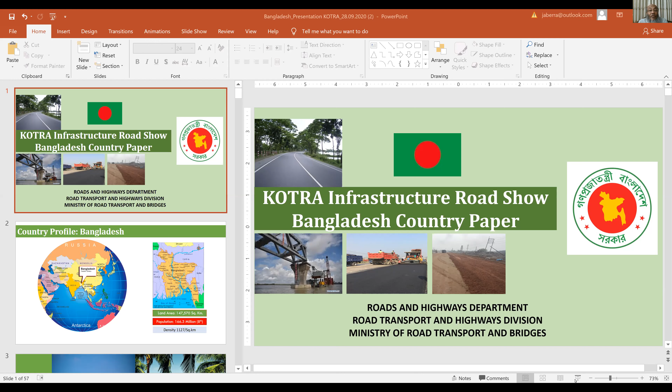About the country Bangladesh, although you may know, the land area is 147,000 square kilometers and we have around 166.3 million population. One of the highest densities of population in this world, about 1,127 people per square kilometer. From the map shown on the left side, you can understand the location of this country.

I guess you are interested about the status of infrastructure in Bangladesh. This is one of our roads we recently built. We are trying to maintain quality-wise like this or even more. This one doesn't show any service road alongside, but we have service roads.

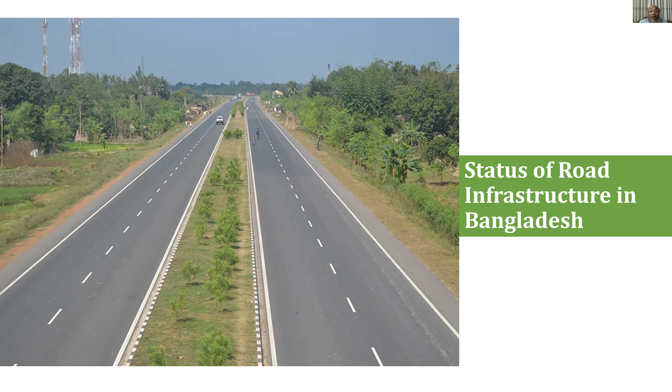This is the structure of our road administration procedure. As you see on our left, we, the Roads and Highways Department, look after the national highway, regional highway, and Zilla highways. If you have time, you can see all of those on our website.

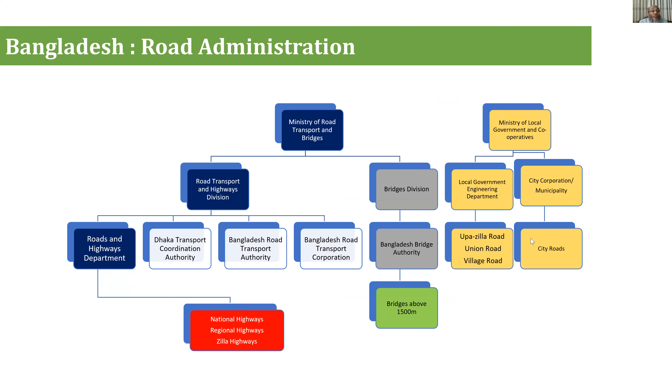We have 4,500 bridges and more than 13,000, about 14,000 culverts in our asset.

So far, we have developed a number of policies and acts related to our road management. Those are the Highway Act, accelerated axle load control station operation, road maintenance fund board, toll policy, land management policy, road transport act, etc.

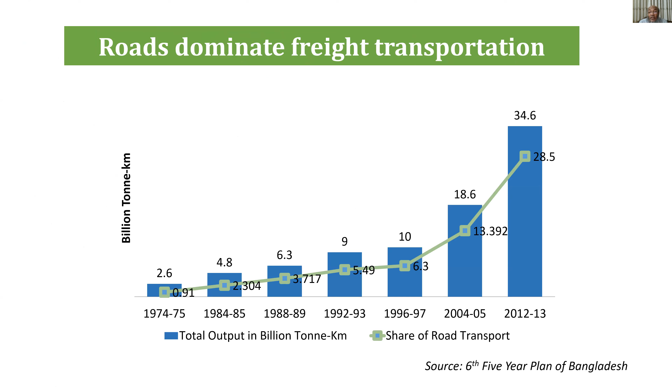Normally, compared to other modes of transport, road dominates freight transportation higher than any other transport mode, and this is ever increasing, as you can see here. The same goes for road-dominant passenger share as well. These are the basic data, and again, it also shows that it is ever increasing every year.

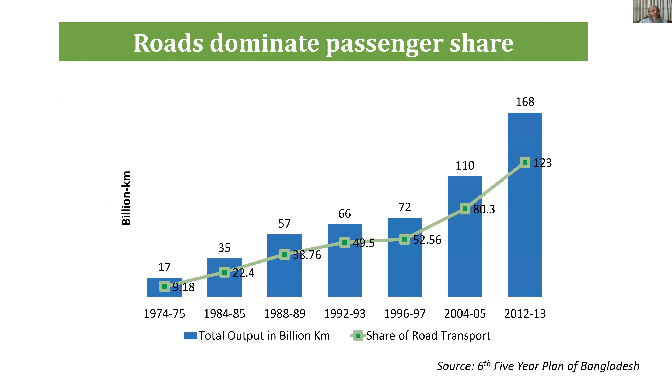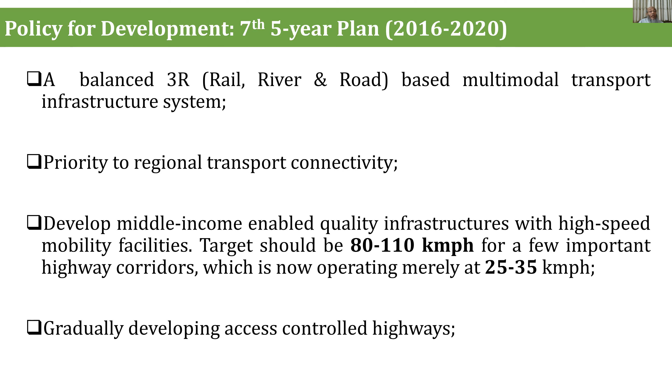In our seventh five-year plan, which spans from 2016 to 2020, we are now trying to balance the 3R: rail, road, and river mode of transport multimodal infrastructure system, prioritizing regional transport connectivity, and developing middle income level quality infrastructure with high-speed mobility facilities. The target should be 80 to 110 kilometers per hour, and gradually we are developing interchange structures, construction of interchange facilities besides highway widening on major junctions.

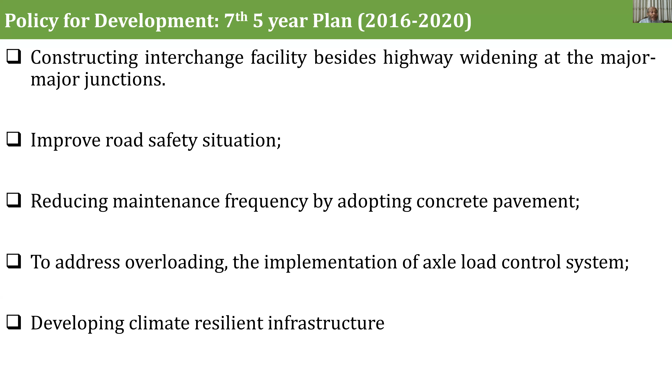Improved road safety is also a concern for us, and reducing maintenance frequency by adopting concrete pavement. We have a number of material options to look into to address overloading. The implementation of an axle load control system is also something we are trying to implement, and as you have done already, we are also trying to develop climate-resilient infrastructures.

Our roads are a part of our regional connectivity corridor. As you know, the country Bangladesh is surrounded mostly by India; only at the east, southeast part is Myanmar connected. These regional connectivities include the Asian Highway, SAARC Highway, SASEC Highway, BIMSTEC Corridor, and BCIM Corridor. We have a total of about 2,777 kilometers of roads that are part of these regional connectivity corridors.

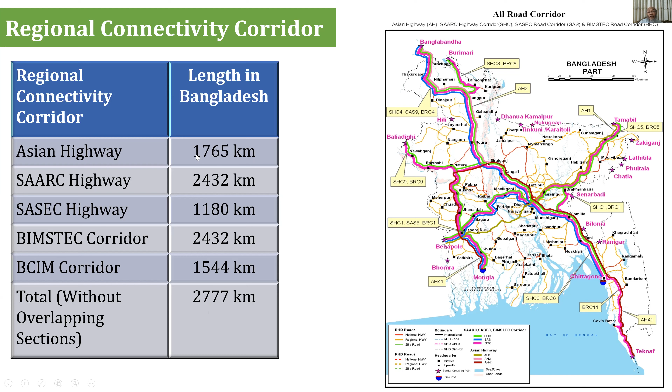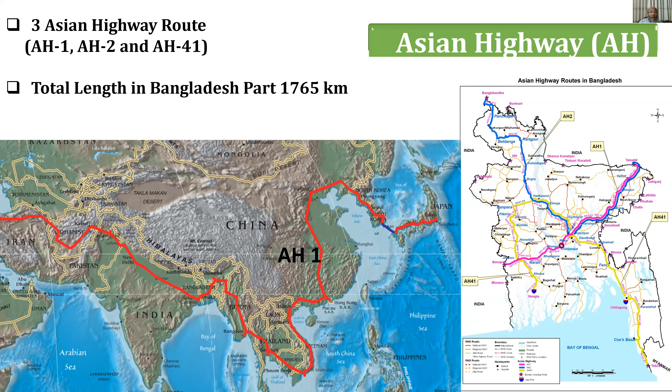Bangladesh passes three Asian Highway routes: Asian Highway 1, 2, and 41. Total length of this Asian Highway road in Bangladesh is about 1,765 kilometers. All those are shown in the map highlighting colors.

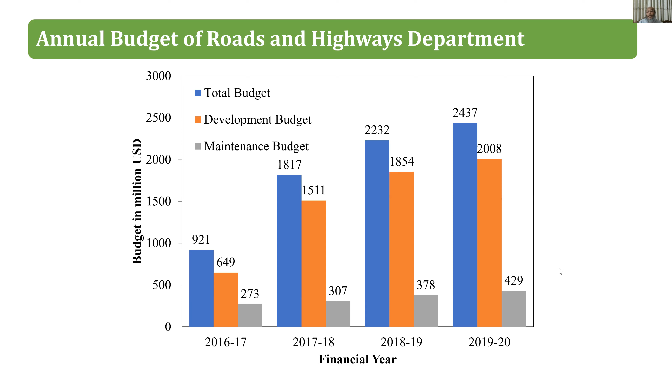Individually, this is about the Kanchpur, Meghna, and Gumti three bridge project funded by JICA, constructed, and almost finished by a Japanese firm called Obayashi Corporation. Project cost was 1.06 billion US dollars.

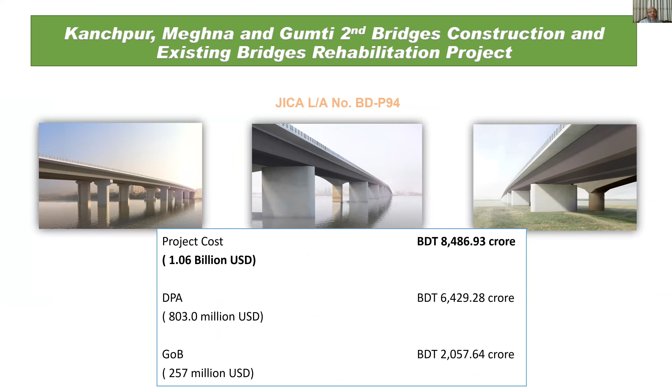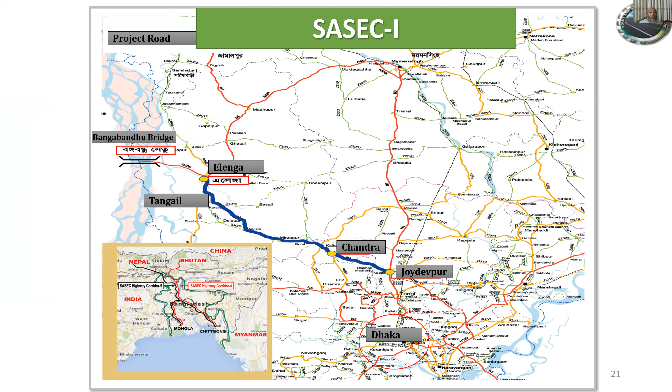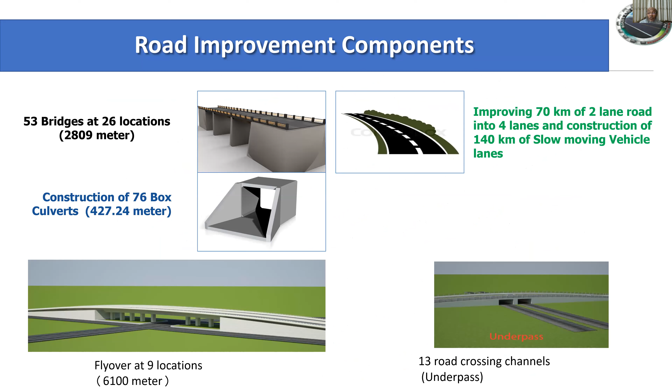SASEC 1 is another important corridor we are trying to develop, from a place just beside Dhaka city, Joydevpur, to Elenga. It's a typical road improvement case with components like 70 kilometers of road, 53 bridges at 26 locations, flyovers in 9 locations, box culverts, and some 13 road crossing channels, underpasses, and footbridges.

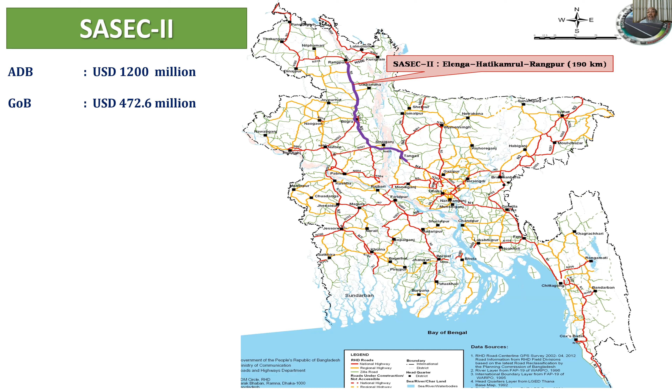SASEC 2 is another ongoing ADB funded project, about a $1.2 billion project that also continues. It starts from the end of SASEC 1, at a place called Elenga, and then goes to the northern part of Bangladesh, Rangpur, close to the Indian border. Major components are flyovers at 3 locations, underpasses at 39 locations, 26 bridges, and improvement of 190 kilometers of road.

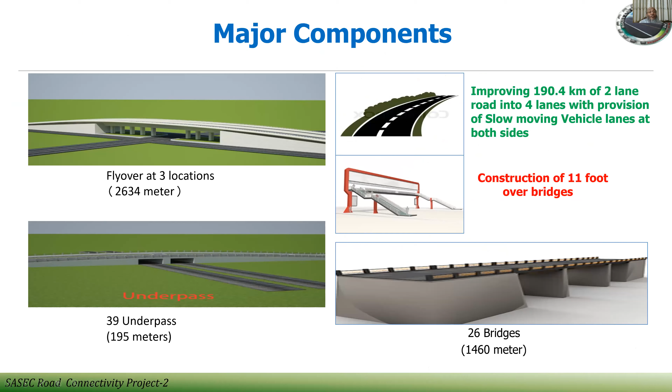Cross-border infrastructure development project is another JICA funded project. In this project there are a number of bridges, and one of the major bridges, called Kalna, is 680 meters. Again, Japanese construction companies are implementing those.

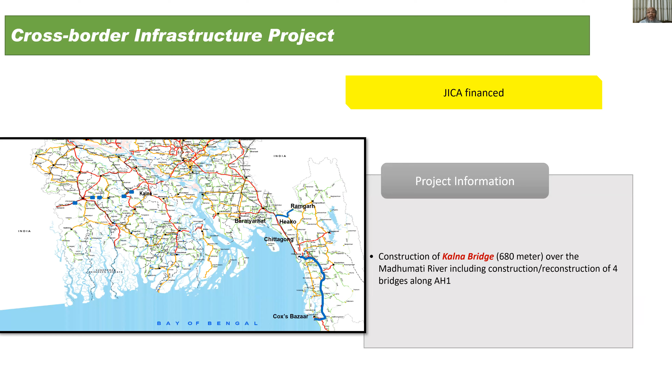The Greater Dhaka Sustainable Urban Transport Project is near Dhaka. It's actually a bus rapid transit development project, the first of its kind in Bangladesh, starting from Gazipur to the airport, and from the airport going further north - that is the corridor we have started to develop. After successful completion of this one, looking into its success, we have a plan to construct more. Let us see how it works.

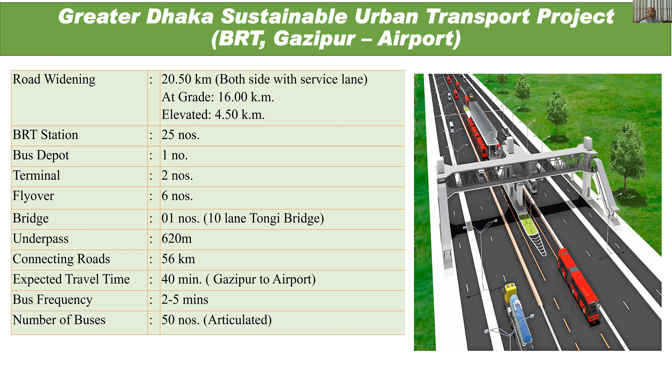Western Bangladesh Bridge Improvement Project is another JICA funded project. A total of 61 bridges are under this project, and construction work is going on.

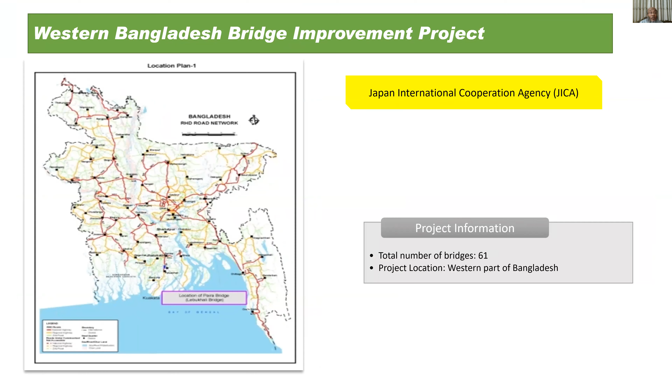Matarbari Port Access Road is another greenfield development. Matarbari is an island where, with Japanese JICA funding, we are trying to develop a coal center and a number of power plants. Alongside the power plants, the whole island is now being planned to develop as an industrial city.

Since it is an island, it is connected with a national highway, so the connection between the national highway and this port is the project we are talking about, Matarbari Port Access Road. Project cost is $82 million.

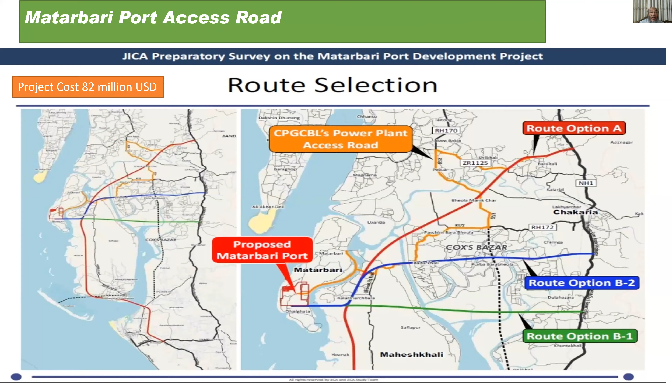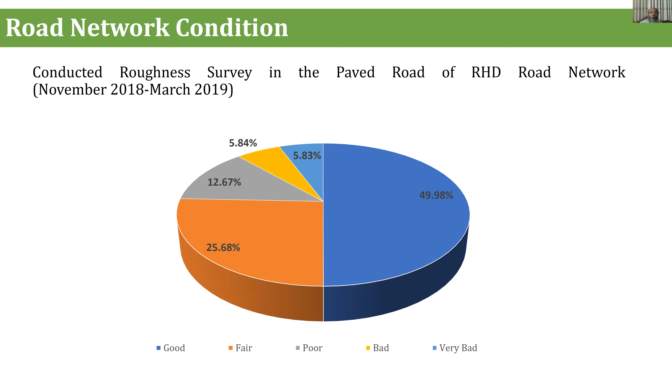If we look into road network condition, we see that we have near about 50% good quality road, 26% fair, and 12% poor. About 5.84% is bad quality road, not that good anyway, and the remaining near about 6% is also very bad. So we need to move forward and improve further on this road.

You might be very interested in what our future plan is, and how, definitely, you can help us or participate in this kind of road development work.

At the moment, we are conducting a number of study works, because if you want to develop roads, we need to conduct feasibility studies, and in some cases go for detailed design. ADB has come forward and taken the initiative to conduct this kind of study, and some of them have already moved into implementation. SASEC 1 and 2 are examples of this effort. So far, we have conducted 152 kilometers of road detailed feasibility study and design.

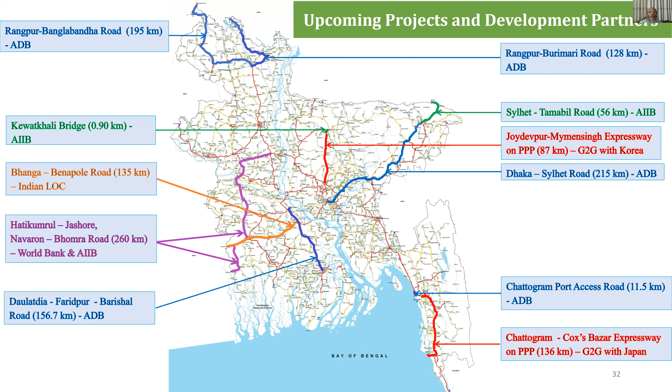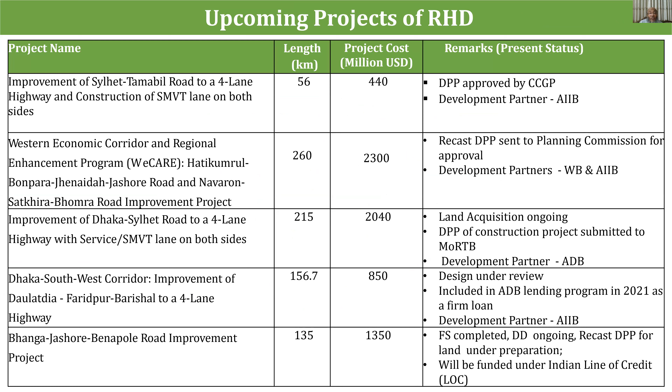Okay, those are in tabular format, whatever we have seen before in the map with locations. Here are some basic data like the project name, length, project cost, and status. If you are interested, you can see the same thing here. This is the second page, which will give you a chance to choose whichever one you are interested in.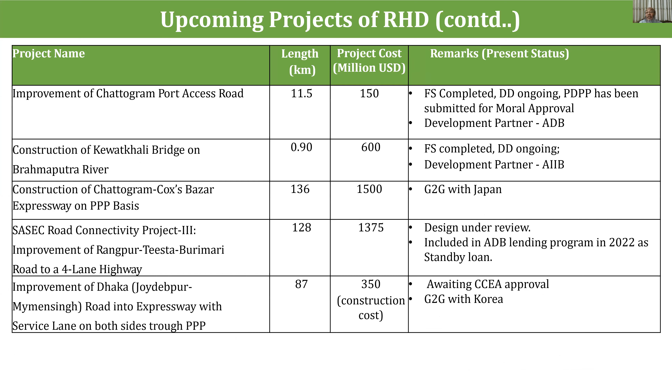A bit of detail on this one: Sylhet Tamabil road starts from a city called Sylhet in the north, and Tamabil is on the border with India. So 56 kilometers of road.

So Sylhet Tamabil is about 56 kilometers and Dhaka Sylhet is 226 kilometers. The lane configuration is very typical for road projects we are taking up at this moment: 4 lanes plus service lanes on both sides. On this Sylhet Tamabil road, we have 10 footbridges and 21 bridges. In detail, the corridor looks like this.

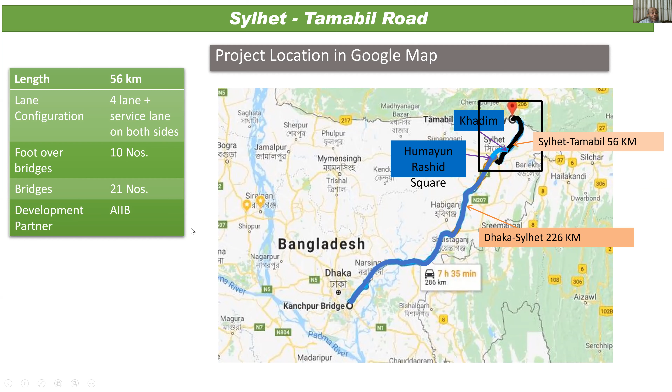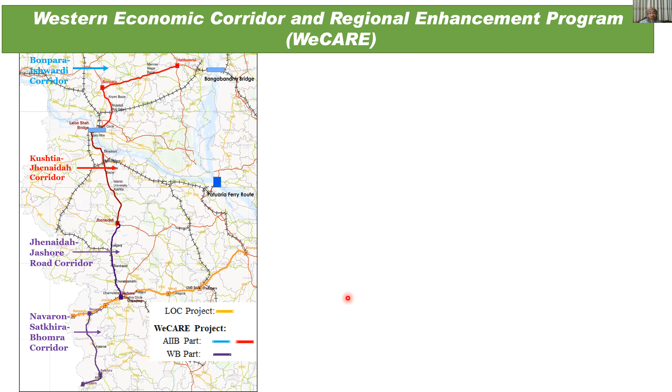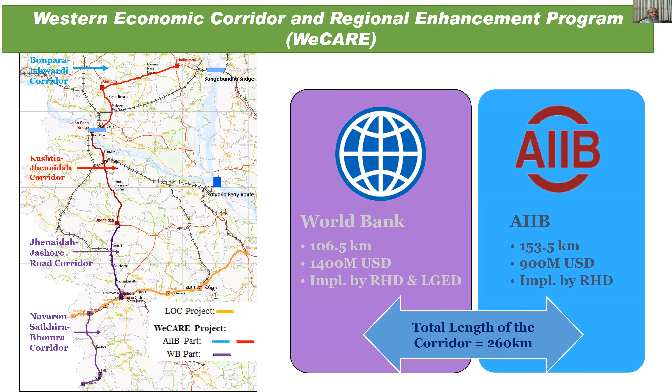The number of sections we have to see, because of the readiness of project preparation, we have to divide into basically 4 segments. These are the details, but we have a time constraint so I may have to go faster. Anyway, this is World Bank funded. World Bank will take care of 106 kilometers with 1.4 billion US dollars, and AIIB will take care of 154 kilometers with 900 million US dollars fund. Total length of corridor is 260 kilometers, Dhaka-Sylhet.

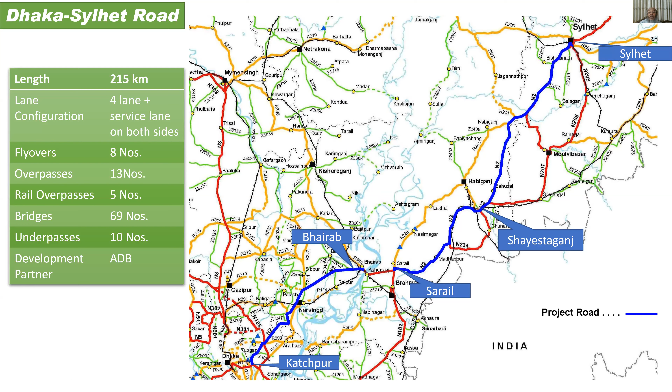The development project proforma is almost finished, so soon the project authority will start the advanced procurement process. There we have, as usual, 4 lane plus service lane either side, flyover 8 numbers, overpass 13 numbers, rail overpass 5 numbers, bridges 69 numbers, underpass 10 numbers, and ADB is the development partner.

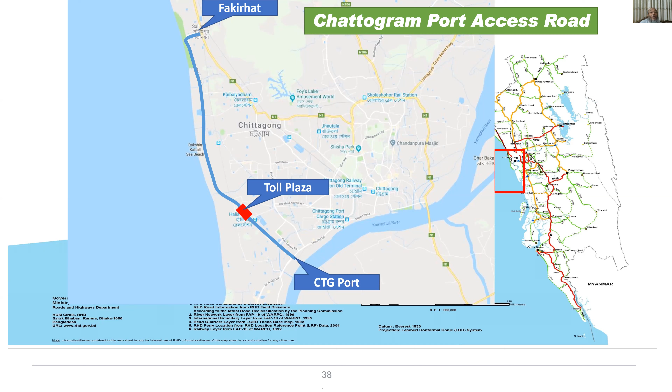Chittagong Port Access Road, as I said before, it's an 11.5 kilometer road connecting the Chittagong Port to the nearest national highway, a shortcut route, and it will also connect the southeastern part of the country. So it's an important road.

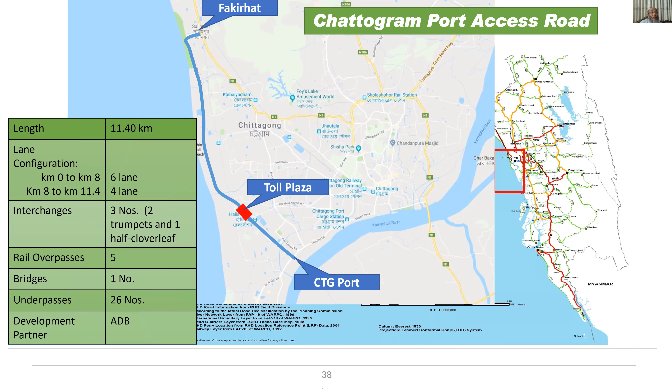Joydebpur Mymensingh, as you know, is a G2G PPP with Korean government fund, and it's about $350 million. Length is 87 kilometers.

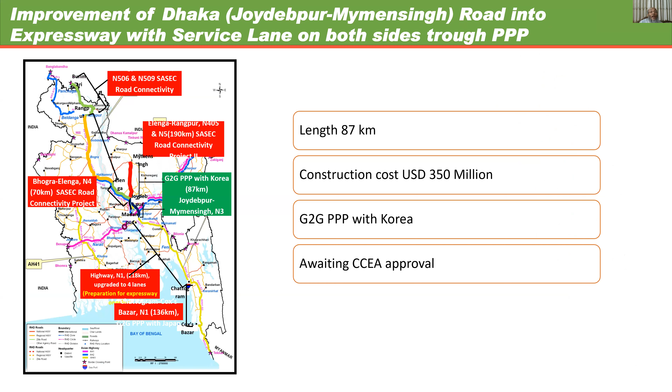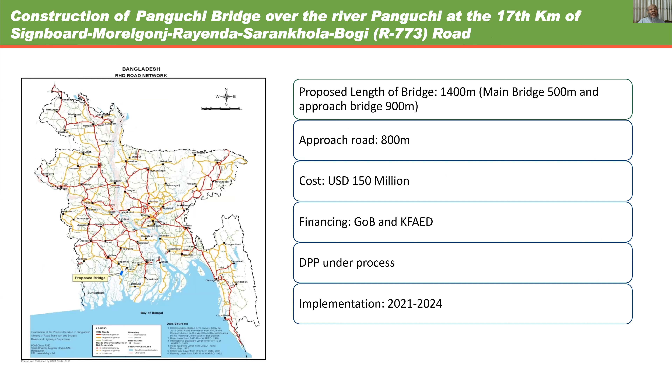Another bridge, also GOB and KFAED. This is about $150 million.

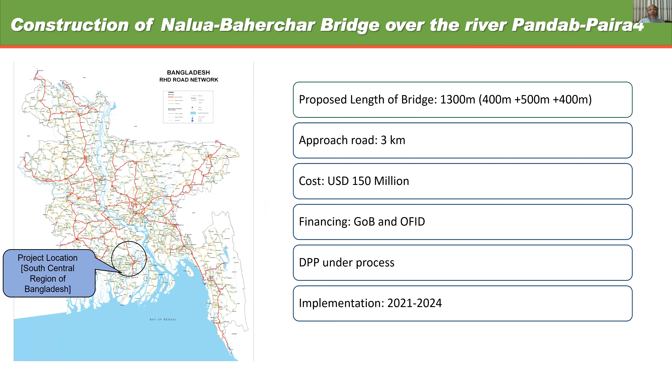This is another bridge, again in the southern part. As you know, the southern part is full of rivers, so we need to construct more bridges.

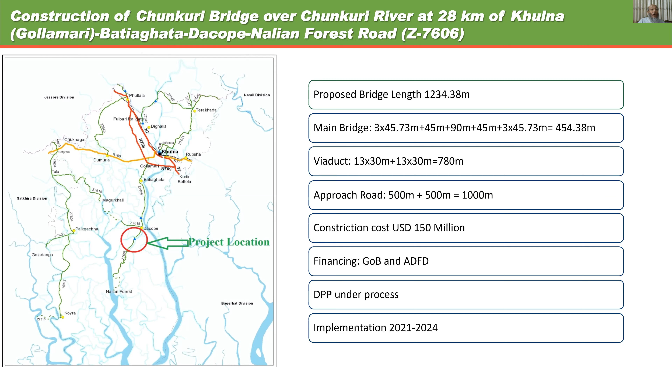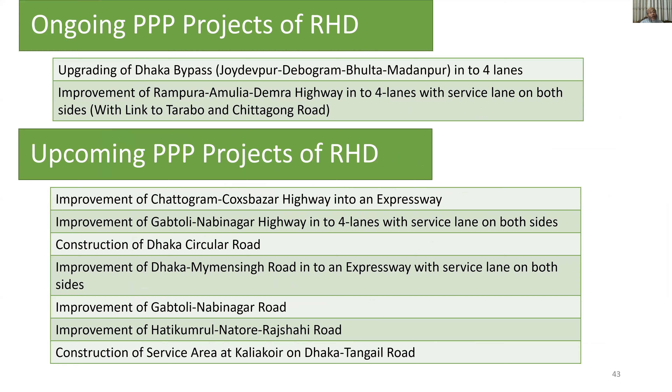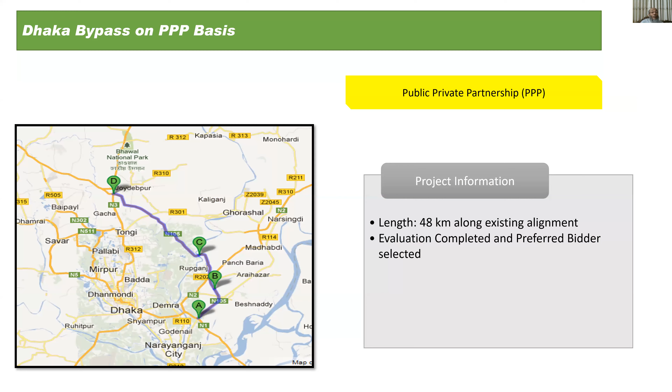As we discussed before, the Dhaka Bypass PPP project is already awarded, and soon they will start their implementation work. Rampura Amulia Demra, another project already awarded, and then they will start their work. Improvement of Chittagong Coxbazar is also another PPP project we mentioned before with JICA fund.

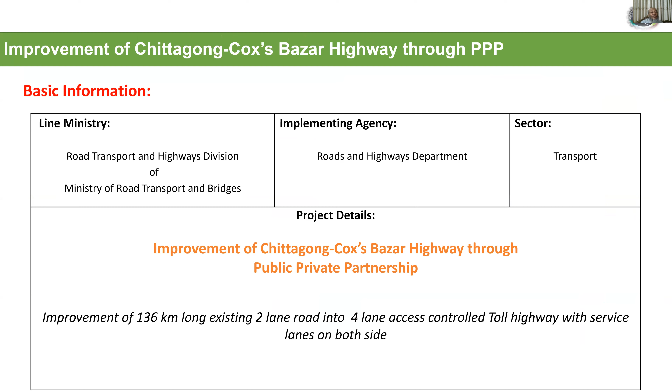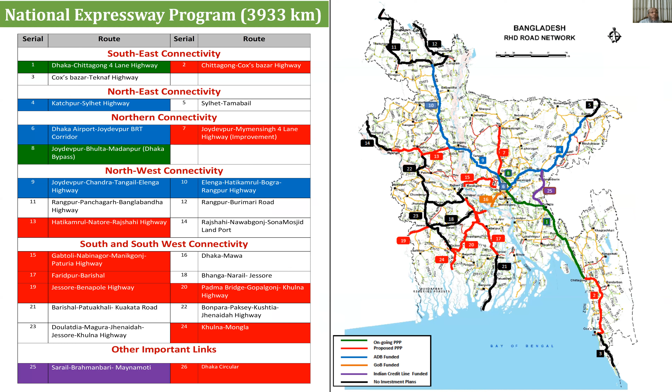Upcoming projects: G2G Korea, already mentioned, Dhaka Joydebpur to Mymensingh, and it is finalized. Another one, Tongi Kaliganj Ghorashal Panchdona Road, is also under negotiation with the Korean government.

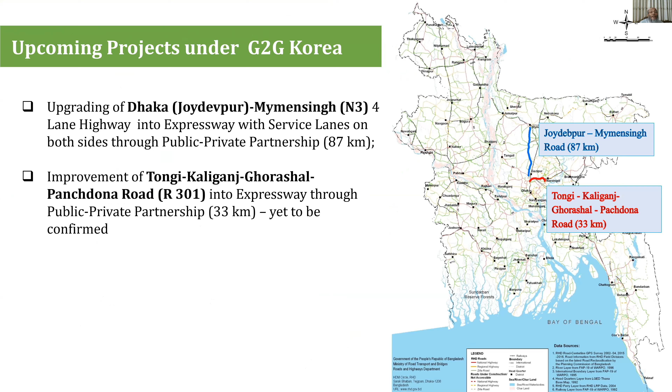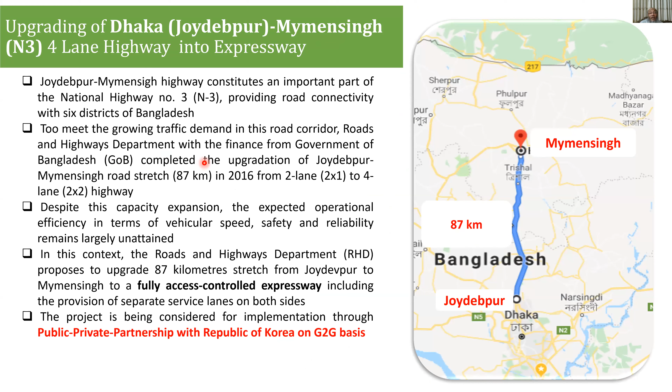If you are interested, in the map it's shown Joydebpur to Mymensingh, and some basic facts about those projects are here. So let's see how... definitely it will be a direct Korean contribution to Bangladesh through this project.

This is about some projects under the planning stage with Bangladesh Bridge Authority, one of our sister organizations in our ministry. They normally look after long span bridges and special type structures. So these are the names of some of those projects.

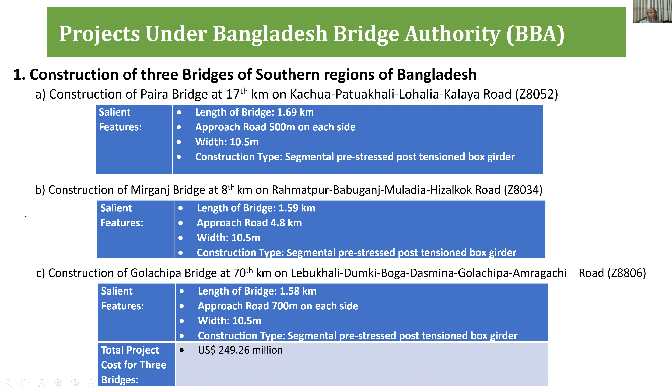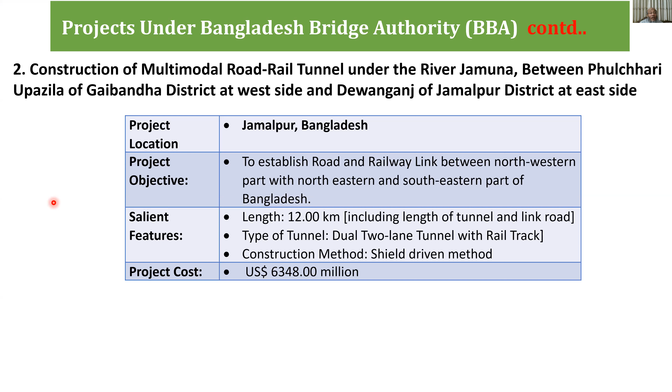This is one of the tunnels they are planning to build in the northern part of Bangladesh under a very wide river called Jamuna.

Another bridge near Meghna Bridge is about 2.5 kilometers. So if you are interested, you can go into detail.

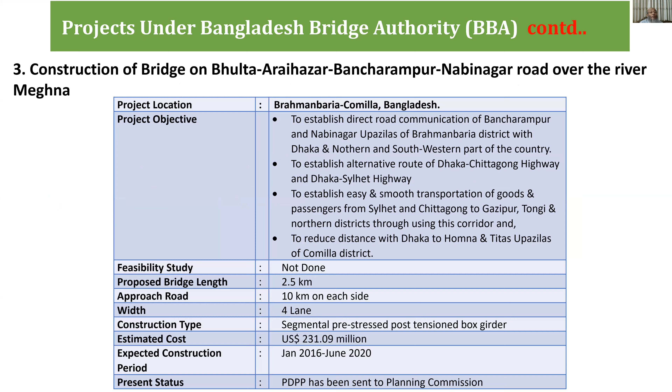This is about a middle ring road project we are planning to develop.

This next one is about a bridge again on the southern side. It's about a 2 kilometer span.

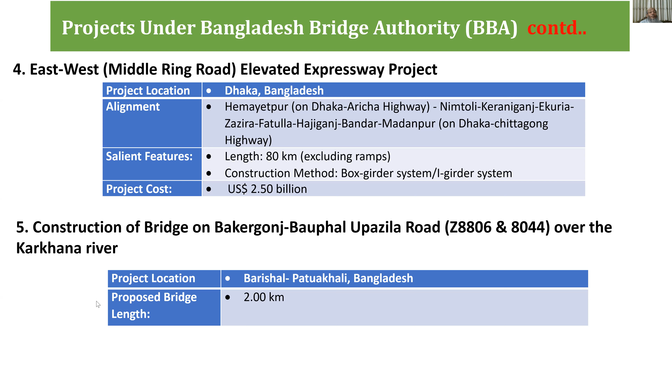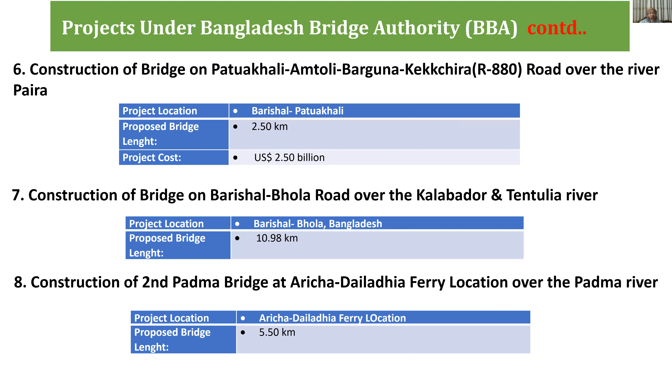Number 6 is another long span bridge, 2.5 kilometers. Another about 11 kilometer bridge connecting an island called Bhola with the mainland. Second Padma is another milestone project we have to do after successful implementation of the first Padma bridge. That is about 5.5 kilometers.

We have some future plans for research and development in collaboration with local and foreign institutions, upgradation of assessment systems, modernization of construction and maintenance equipment, capacity strengthening of our road management organizations. Pavement technology advancement is also an important aspect we need to learn from you, sir.

Sir, one minute left.